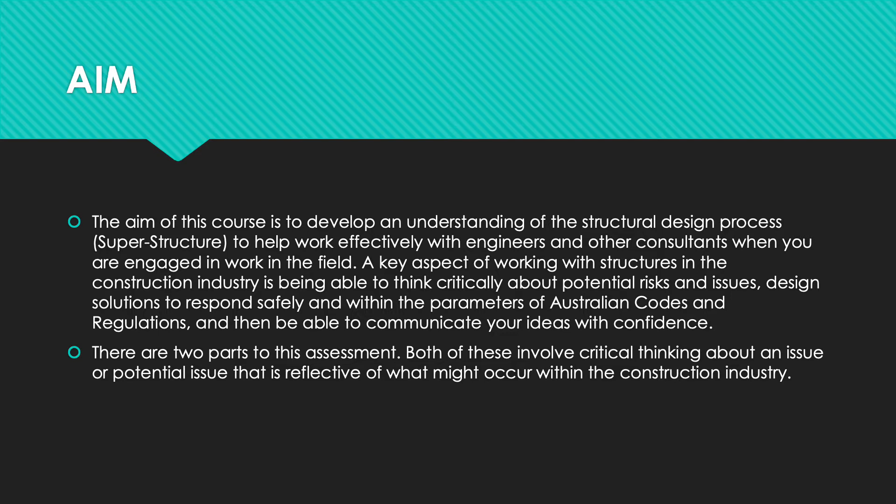There are two parts to this assignment. Both of these involve critical thinking about an issue or potential issue that is reflective of what might occur within the construction industry. The following report establishes how to develop an understanding of a structural design process, focusing on structural loads and paths to design specific structural members of a domestic shed.

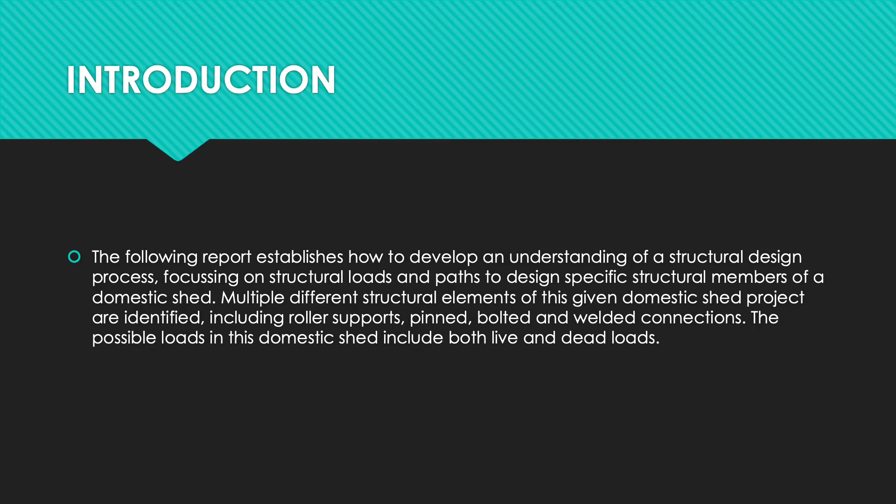Multiple different structural elements of this given domestic shed project are identified, including roller supports, pinned, bolted, and welded connections. The possible loads in this domestic shed include both live and dead loads. There are two main components in the process of a structural design. These are load types and connections. Through both of these, the basic design of the shed is able to be developed. Load types are the type of loads which are applied to the shed, whereas the connections support and transfer these loads.

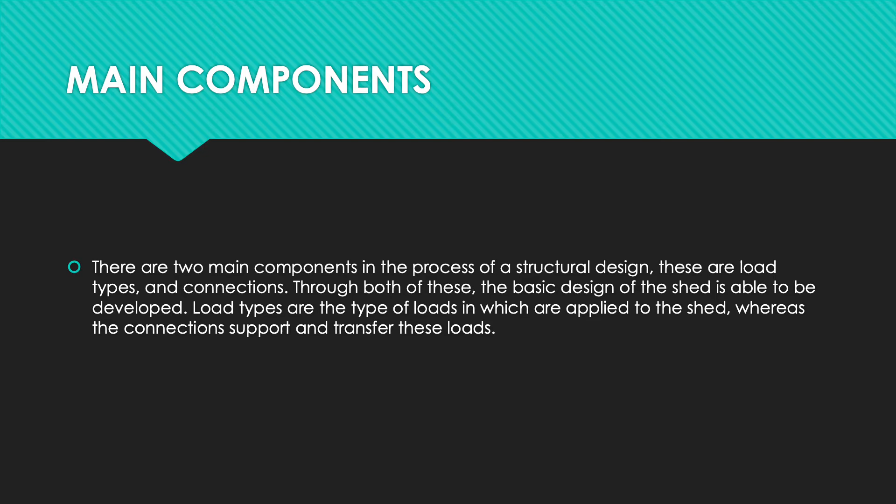The most commonly known loads in construction are dead loads and live loads. When talking about dead loads, throughout the entirety of a structure, the dead load is continuous with the roof of a structure being measured as part of the dead load. The floor surfacing materials as well as fixtures such as plasterboards, cupboards and walls make up these components which are the dead load of the structure. Also in that is the weight of the actual structure itself.

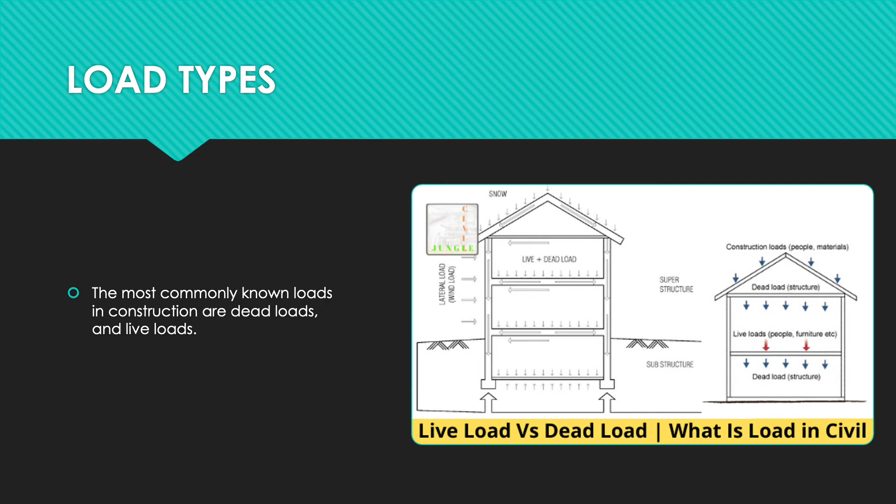If fixed into a position where it can't move, everything inside of the structure, including the materials, are then part of the dead load. Due to having the known dimensions as well as weights of the materials which are utilised in the structure, the dead load can then be calculated in a precise manner. Live loads are within the structure. All of the moving objects are the live load. Depending on the usage of the structure itself, live loads can differ from structure to structure. An example would be that cars driving over a bridge would be the live loads on the bridge.

Wind load. Wind loads, wind actions, can have a significant effect on a building's design due to the high wind speeds being able to seriously damage any structure if designed poorly. Wind is caused by changes in the air pressure, which is affected by temperature, sea level, and the amount of water vapor in the air. Wind travelling or passing over and through a building will create pressure, as well as compression and suction on the roof and walls of the structure.

When designing a structure, external and internal wind pressures have to be accounted for in the design, otherwise this will lead to significant failure. In the images shown above, the arrows pressing against the walls of the building represent the pressure and compression created by the wind speed. The arrows being pointed outward represent the suction created by the wind as it passes over and through the structure. Depending on the direction of the wind, walls and roofs will be affected by suction, pressure, and compression.

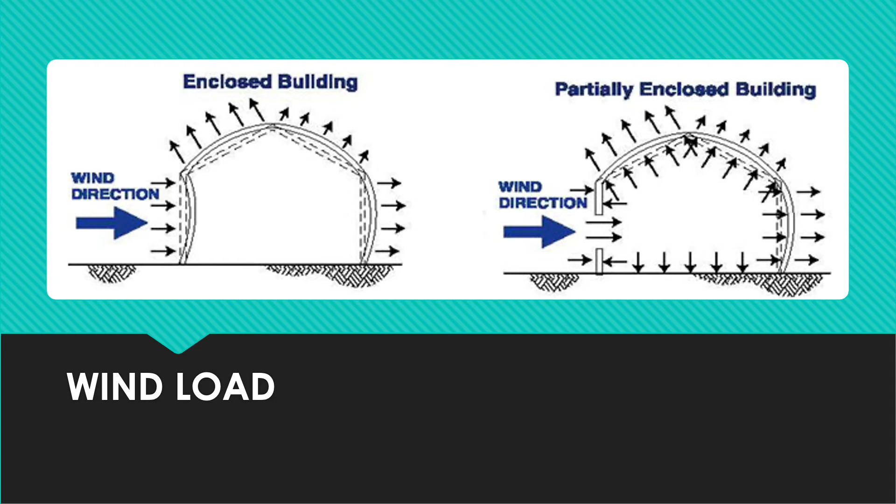Roller support. As the majority of structures are exposed to lateral loads, roller supports are not able to deliver resistance to the lateral forces. Without fighting against the applied horizontal force, the roller support moves across the surface as the force is applied horizontally to the bridge. Most structures are exposed to lateral loads, and the problem arises as roller supports are not able to provide the lateral force resistance. As a result, this means that the building and structure must have another type of support.

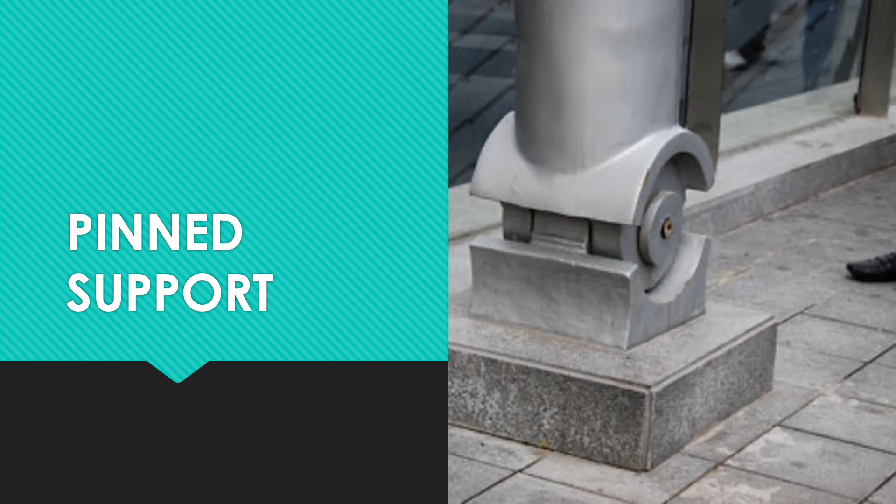Pin support. A pinned connection is subject to moment and opposes both horizontally and vertically. If the moment is less than the limit of the support connection, then the pin connection can oppose small measures of moment. This specific type of connection is generally used when joining sections or columns at the base, as these members prove to be a pivotal piece in the structure, limiting any loads directionally.

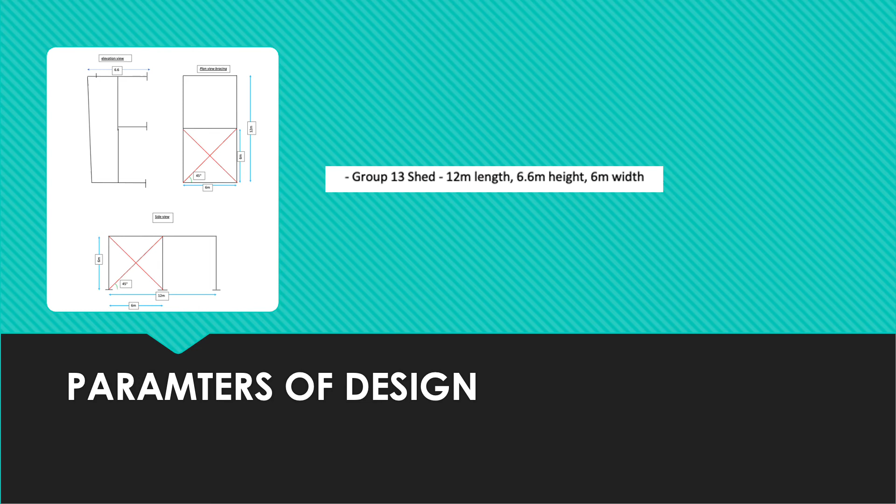The parameters of design for the project. Our group, Group 13, had a shed length of 12 meters with a 6.6 meter height and 6 meter width. Project design. Space Gass was a program where we had to draw the frame and apply various loads that would affect the frame. The loads that affected the frame were bending moment, shear force, deflection, and axial compression.

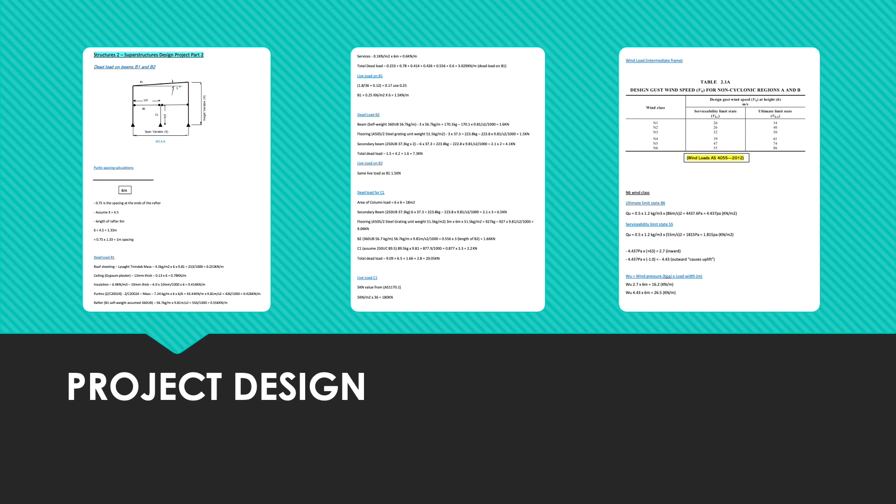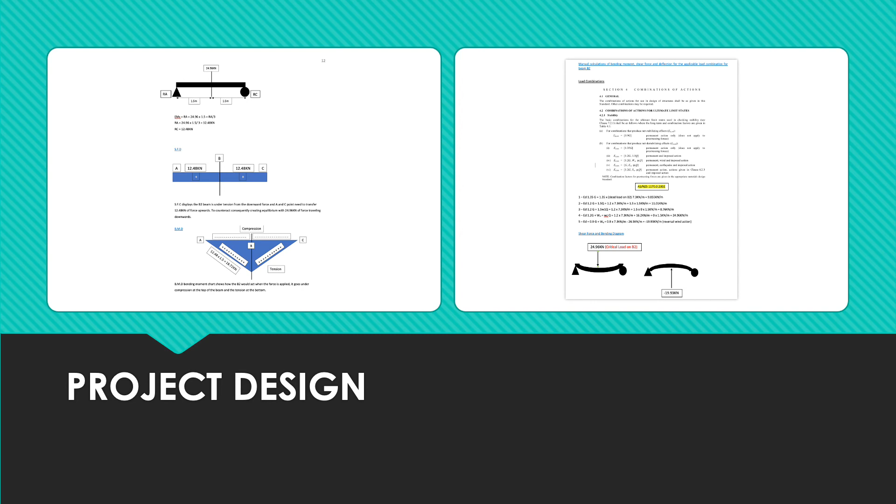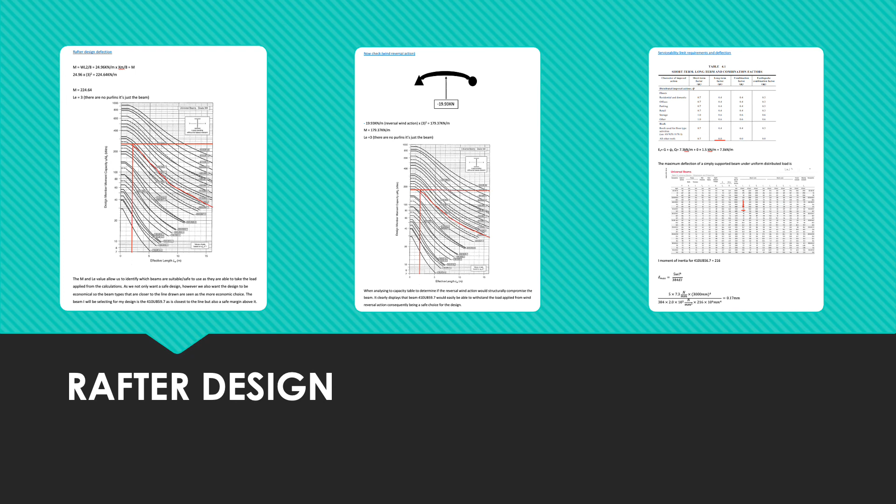Bending, shear force and deflection were the things that mainly affected B2 and its design, as it's a horizontal member and component of the frame. C1 is affected by the axial force as the load travels from the top of the beam to the bottom, thus creating compression. To get these values and compare them to the manual calculations, both dead and live loads were applied to the beam to see how B2 and C1 would act under these different types of loads.

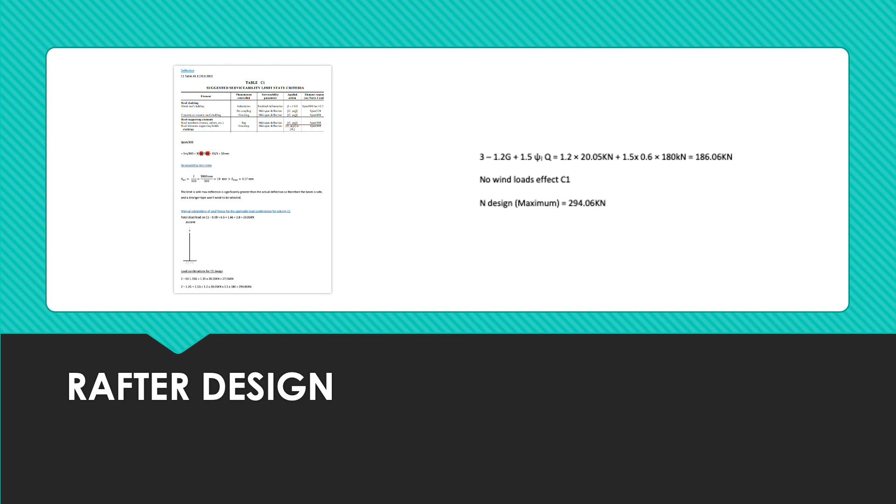Space Gass also helped us in identifying and understanding the mistakes that we had made whilst doing the manual calculations. As a result of this, Space Gass gave us a more accurate result and really helped us visualize how the loads affect a member component of the design frame. As you can see from the following slides, they were all the calculations throughout the design project, the rafter design and the column design. These were a lengthy process, but Space Gass was able to help us in identifying and achieving such accurate results.